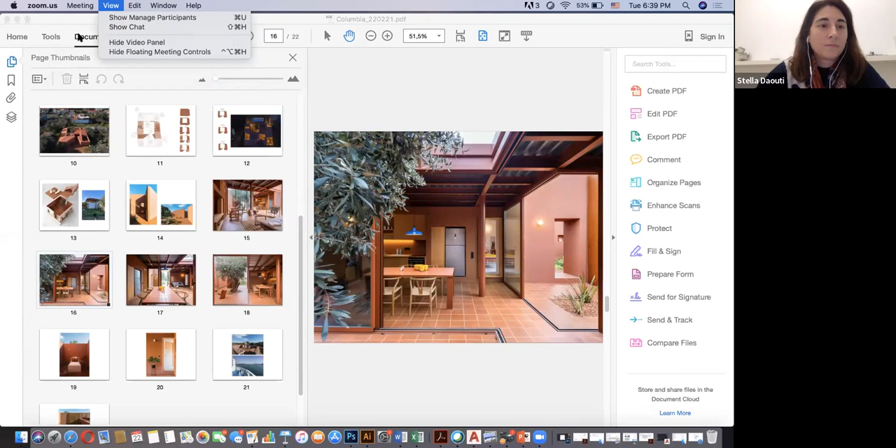I'm going to share my screen in order to... can I do that? Yes. Okay, I think I can now. Okay, here we are. Is it good now? Can everyone see the screen? Yes, we can. Okay, thank you.

So today we're going to present a very small project. It's a small house that we recently completed, and it's a very dear project to the office. It was designed together with Michael John Raftopoulos and Yorgos Mitroulias, who is also a Columbia alumnus, from 2004.

Salamis—many of you are aware of it—but it's a very interesting place. It's a small island really close to Athens, but at the same time not a touristic destination. On the contrary, it's very well known for its maritime past, its industrial zone, and its naval base, the military naval base. All these characteristics really shielded it from becoming a touristic destination like other small islands close to Athens, such as Aegina or Spetses. So for starters, this was an interesting place for us architects when we were asked to design a very small summer and weekend house for two clients.

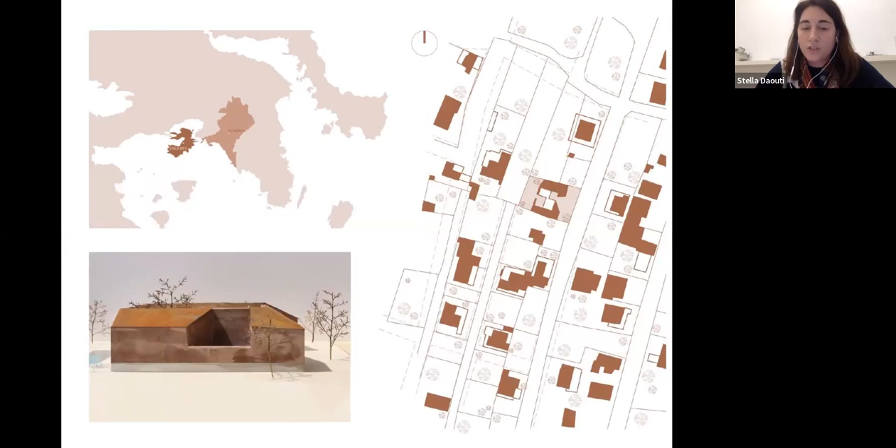That was another interesting part of the project. Looking closer to the neighborhood, you can see how the streets are narrow, they don't have pavements, they're very rudimentary in terms of infrastructure.

That was a part concerning context that really interested us. Another part of interest in this project was the way it was designed. It was a very open-ended process. The owners, a middle-aged woman with her son, did not have a very specific list of needs, as many clients usually do.

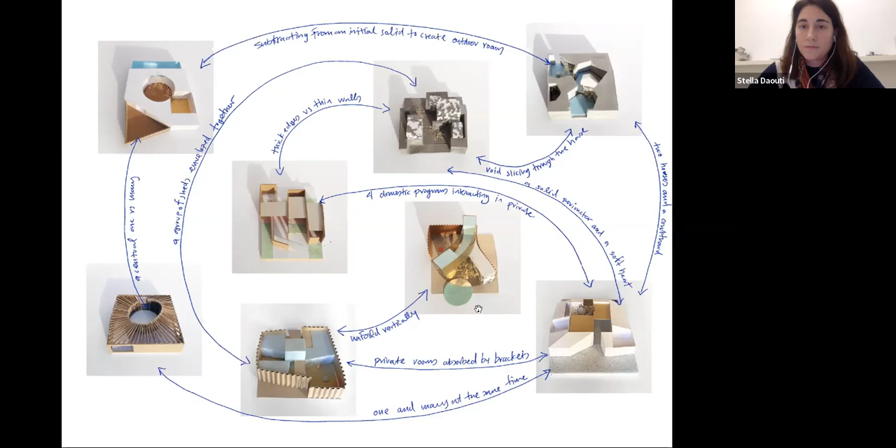For us it was interesting because, comparing it to the existing surrounding houses that had this concept of addition, in our case it was a bit the opposite. We started with a very solid volume and started subtracting from it in order to create courtyards that the house would look into, mainly this central courtyard.

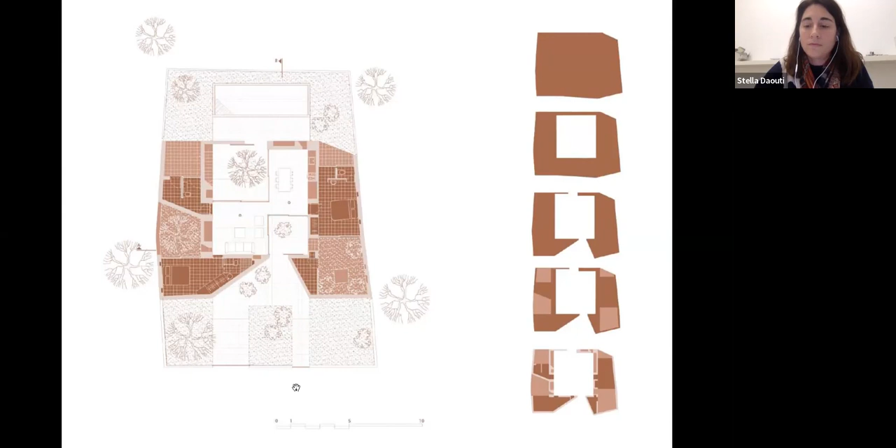In the central courtyard one can find a first small courtyard that serves as an entrance court. Then you have two smaller glass volumes, lightweight constructions, that host the main spaces of the house - the living room, kitchen and dining room. The olive tree courtyard is the second courtyard of this big light square that leads to the back of the house, where you have a small swimming pool.

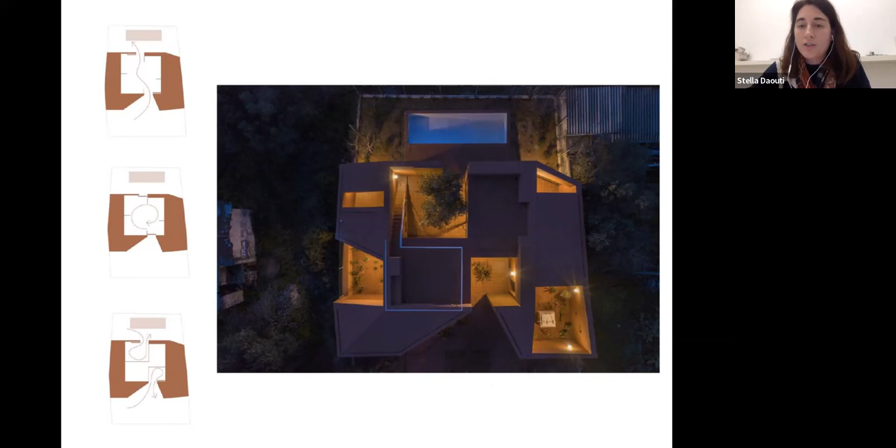In those diagrams, one can see that the enclosed parts of the house have full height sliding doors that can open or close in different ways, creating an interior that is very flexible. One can have an interior that gives more to the entrance area, or one that is completely enclosed, or one can slice the house in two, with one part open to the front and one part open to the back. This is a very flexible and open space that creates different relations between exterior and interior space.

So here you can see again this central square space, and in comparison to the lightweight construction found in our neighbor's house, which sits on top of the main house, in our case the lightweight construction sits inside, in the center of the house.

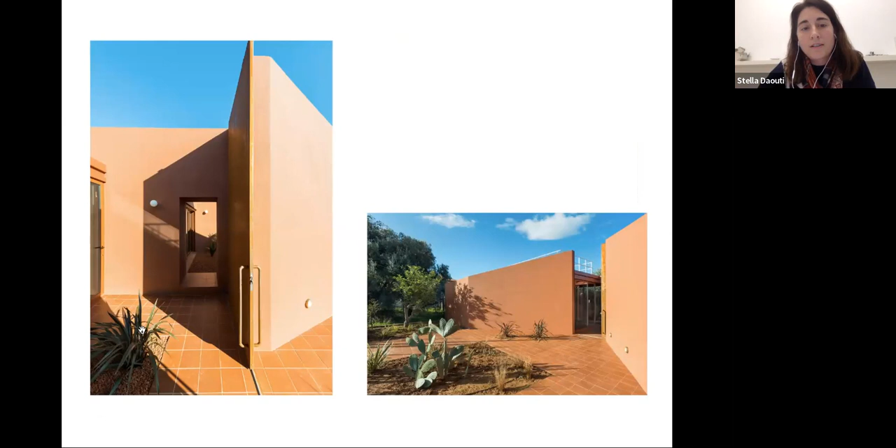Here's the entrance of the house. It's very austere, very monumental. But once we enter inside, this is the central courtyard with the two main spaces that can host a number of domestic rituals one can imagine during a weekend or a summer in this house.

I think that in terms of materiality, there were also a lot of influences coming from the island. We decided to use the primer red paint that comes from the maritime history of the island.

And then one can see on the sides, we have encaved the more private spaces of the house. So this central space works again as a collective space. The house itself becomes a small village where the two more private spaces are found together in this central collective space.

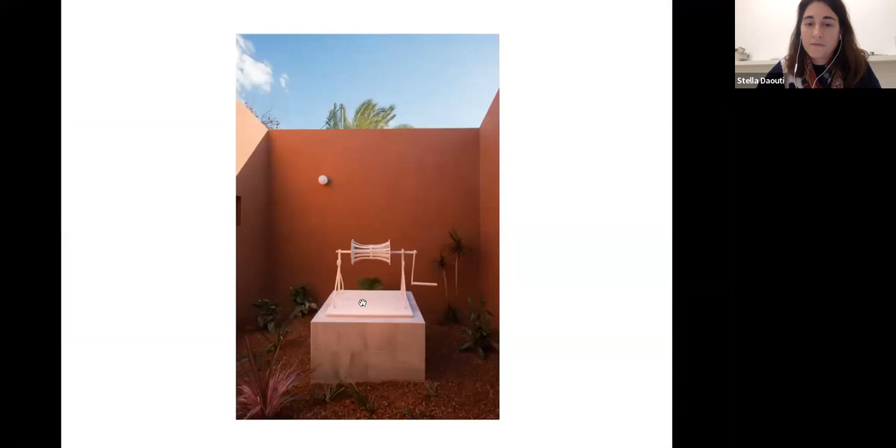The well courtyard, entering at the more private spaces where you have a different feel, more lighter materials. And on top of the house, a small terrace where one can see the olive grove. And one might feel being on the ferry coming to Salamis Island.

Again, this reference to the ferry boats, as someone is leaving the city in order to arrive to the island, we imagine that this door closes behind you and you live your everyday life and become submersed into this more tranquil space that the house offers.

And I think that's it. I don't know how was regarding time. I know we only had 10 minutes, so I'm not sure.

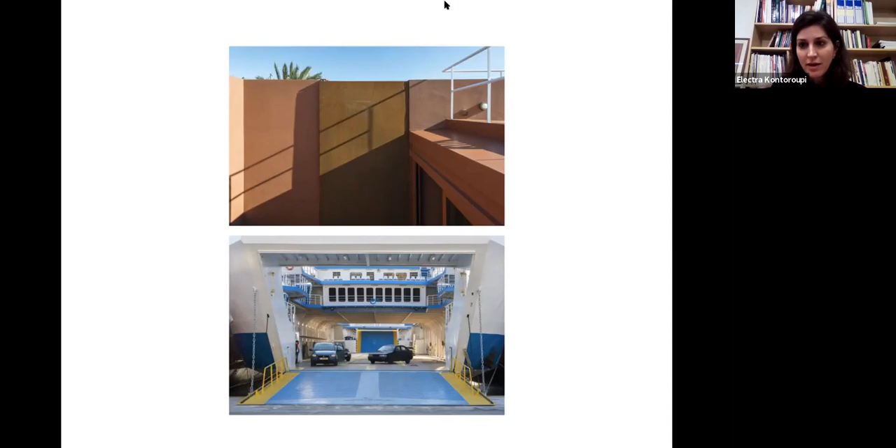And we're going to change completely scale. From a small residence, we're going to move to the urban scale of a city square. Because Evita Fanou and Ariadni are going to present the new design of Aristotle Square in Thessaloniki, a competition they recently won.

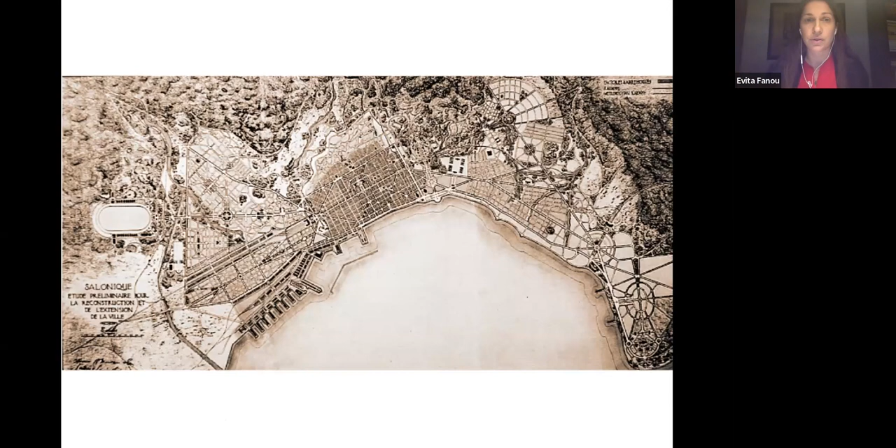This is a zoom in on his plan from 1919. This is Aristotelus axis. Our intervention area, according to the competition brief, starts from the middle of the axis to the sea, including a square by Egnatia Avenue, part of the Aristotelus axis, and this uniquely shaped Aristotelus Square as we know it today.

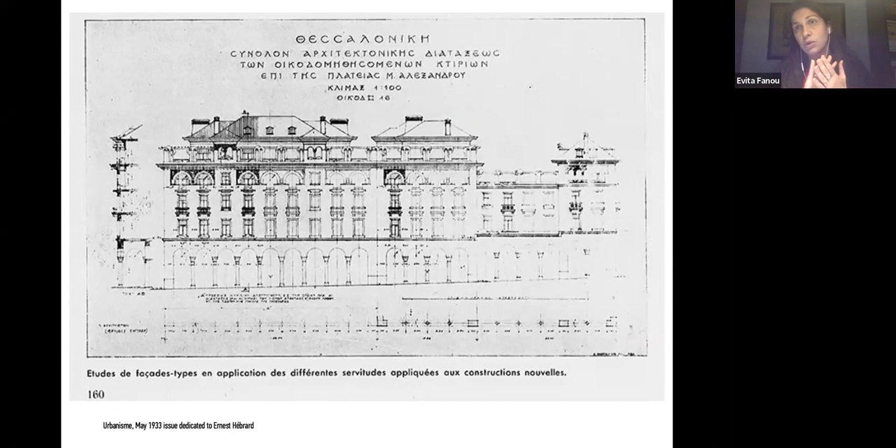This was a big part of the design of the area. He didn't stay with the plan, but also designed the elevations, one of the most specific characteristics being this covered stoa with commercial use on the ground floor, creating this very unique architecture that unifies the public space in our area.

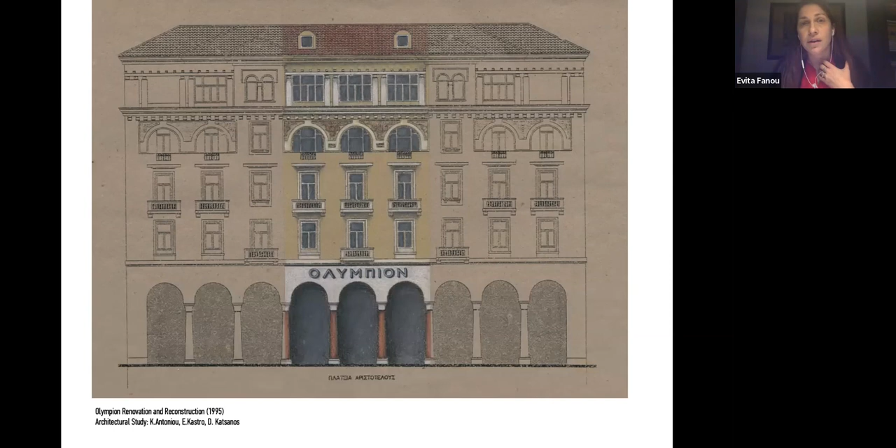We can see a little bit more here with some renovation and reconstruction that happened on those buildings two decades ago, in 1995. Here we can see also the original colors and all these details. This plan of Ernest Hébrard didn't happen in one night, as we understand.

During the course of its history, in recent years, two dates we should remember, because they somehow define the city as we know it today. The first is 1997, when Thessaloniki was the cultural capital of Europe, and part of the axis was pedestrianized. It was also the year an international architectural competition was announced for Aristotle's axis and square.

The first prize was never realized, partly because of the extended excavations that were proposed. Then, many years after that, last year in 2021, there was a new international architectural competition for Aristotle's axis and square, but for a part of the former 1997 area.

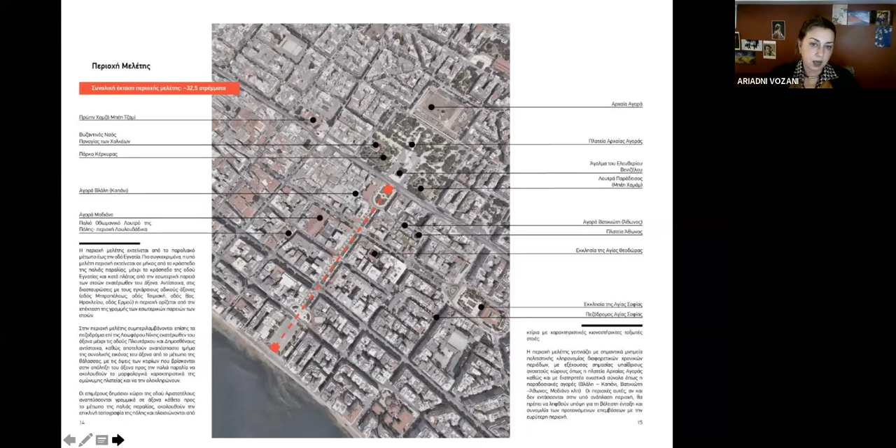Here is an aerial view of how it is today, more or less. We are facing north here, toward Egnatia Square, and facing towards Aristotle Square and the sea. You can see something quite important, that the main axis, as well as extended parts of the pavement, are green areas, so they are not dedicated to circulation.

I think this image shows something quite important for us. It shows these orange buildings, monuments, landmarks, that it's very easy to understand belong to another urban fabric, not the orthogonal urban fabric of today of Ernest Hébrard, but the former tissue of the city, the one we already explained. It was the one destroyed by the fire of 1917.

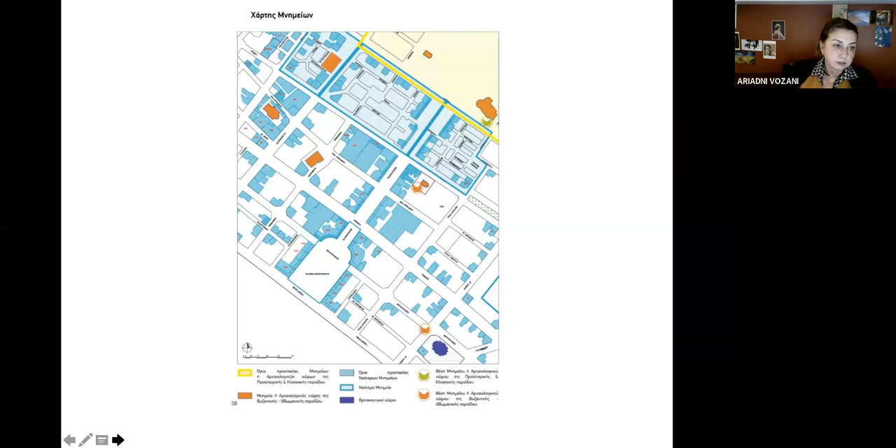Now, we thought there is a kind of memory of the recent history of the city, because of course you may know Thessaloniki has a long history, a Byzantine and Roman history, but this recent history of the city was completely erased in a way. Yes, and it's exactly this map that brought us to our first ideas about the competition.

These orange buildings that were kind of off the grid of Ernest Hébrard, it was a question mark for us. So when I say 'we,' I have to first make a parenthesis and say that we're a team of 5 people, not only me and Ariadni. We also collaborated with 2 more architects, Gregory Voutoufianakis Petropoulos and Dorette Panagiotopoulou, and an architectural student, George Retsos.

So, starting from this map we found in the competition brief, we started putting some questions together, wondering where these monuments actually belong, because these orange buildings were actually monuments of the city. We found a map of the city in our area before the 1917 fire, and we discovered that these monuments actually belong to this old grid that is underneath the new Ernest Hébrard orthogonal system. We thought this old city is a memory that needs to be explored again, highlighted selectively, because these monuments belong in this grid, and this grid was giving directions to these monuments.

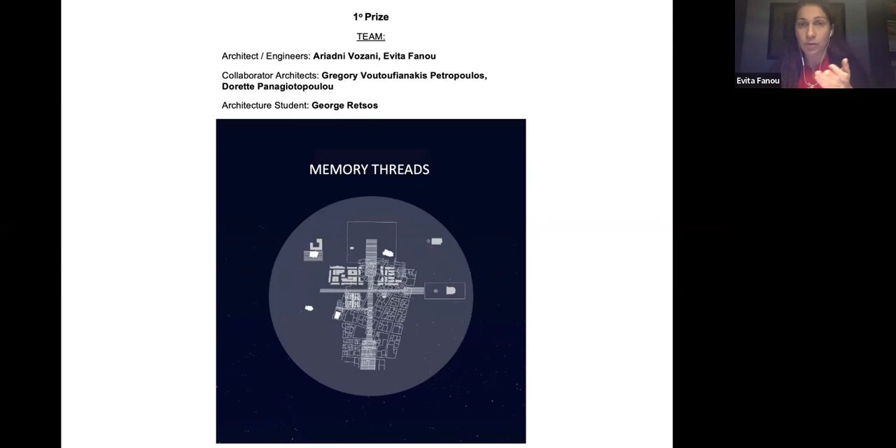So we selectively bring back some threads of that memory of the city that exists. And you can see later how, as we explore and show our proposal, these threads are actually coming to life. You get a glimpse here of how these threads are activated also in the nighttime—they become light fixtures on the floor of our proposal.

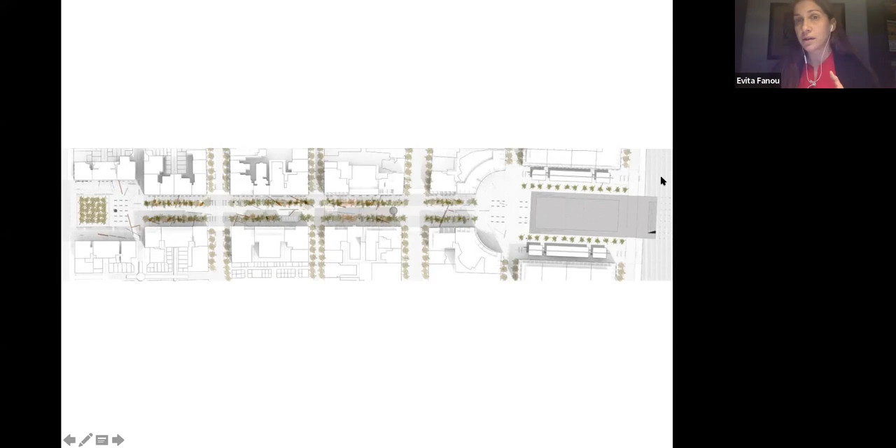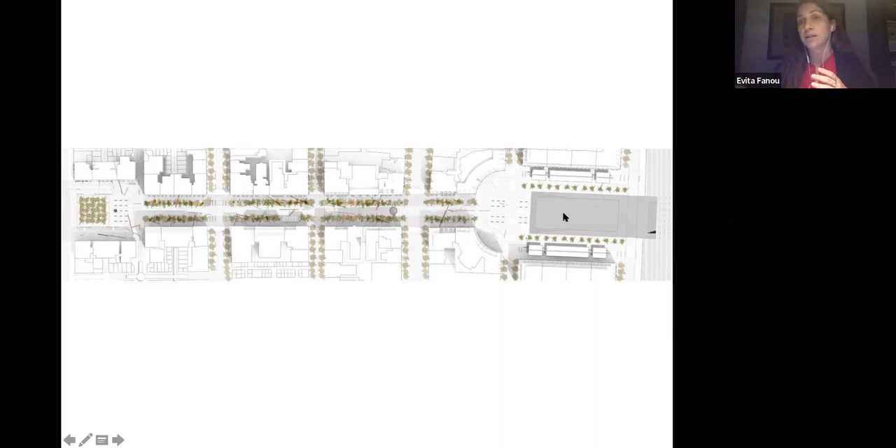And this is the plan, the actual general plan of our intervention. It starts on Egnatia Avenue with a small grove of palm trees and a small threshold between the north of the axis and the south of the axis we were asked to design. We create a linear wide allée in the middle of the axis for people to walk, with trees on both sides, and then we end up on Aristotle Square, creating a central point with different materiality that we extend towards the sea, with some steps where people can sit and enjoy the view of the sea, Olympus Mountain, and the sunset.

In order to understand this drawing better, it's important to see all the different layers that bring it together. We start with the bottom layer—this axis and the whole proposal is organized in parallel zones of circulation, with the middle being the central zone for slow movement. The two different squares were treated completely differently; they have a completely different significance within the city, but they both work as thresholds to connect our proposal with the north and the south, respectively.

The layer on top brings these selective memory threads from the past to that new floor we're introducing. We have another layer of seating typologies organized around the parallel zones that are holding the whole proposal together.

An important element about public space and how it performs over time is water. So we're bringing elements of water from the sea towards the proposal to the north, in different typologies that we categorize as different urban equipment with water. And last but not least, the plantation, trees and greenery that also create shadows across the proposal, and some canopies that were conditioned by the competition to organize the outdoor space of the cafeteria.

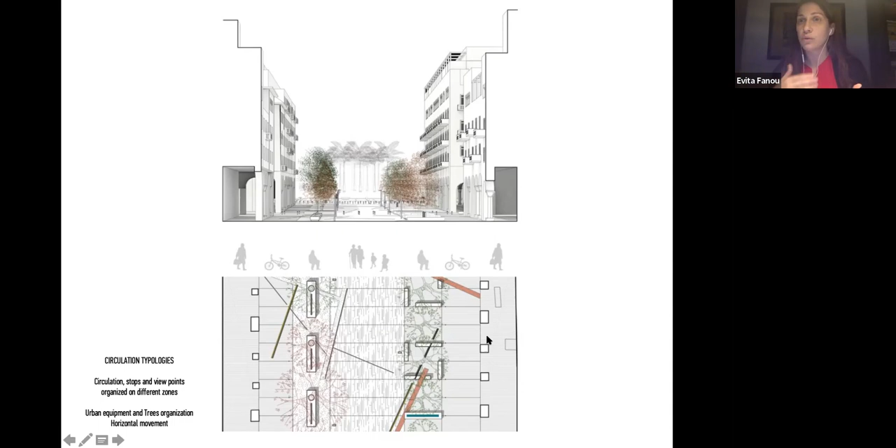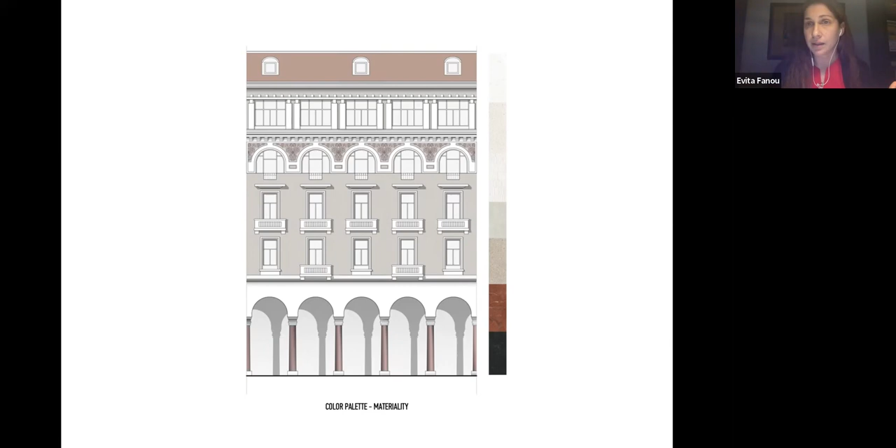Another big aspect of our intervention and proposal was the materiality of it. We decided to borrow the color palette from the Ernest Hébrard listed buildings and translate that to earthy, natural Greek materials like stone and marble, which unify the public space and make the proposal part of the existing context of the Ernest Hébrard buildings. This is a view of how it could look when the zoning, the diagrams, and the actual life on the axis all come together.

Now, even from the beginning of the competition, the decision was to have a mild proposal with continuity from one square to the last, the Aristotle Square.

We strongly believe that underlining specific elements in each different part of this axis, while giving a specific identity, character, and atmosphere to the two squares, was something we had to achieve. So we call these parts of the proposal 'rooms,' even though they're not exactly what we would call in the Renaissance an urban room.

There are five of them. The first is the palm tree room, as we call it, the square adjacent to Egnatia. The second we call the water room and open market room, because there is more strongly the element of water, but also a substructure for an ephemeral market, which you'll see later.

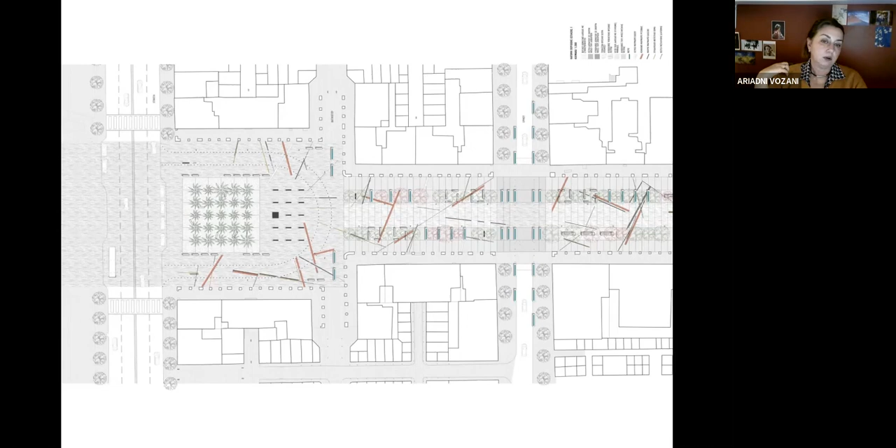Here I think you start to recognize all the rules of the design. One can easily discern that every element of the proposal belongs to the orthogonal grid of the city, but then some selected traces, as Evita said, are highlighted as a hint of the old urban fabric.

We strongly believe this square had to have a kind of natural canopy, and the palm tree offers this canopy, but with long trunks that for us felt like a colonnade. This was important because from the beginning of this promenade, you constantly had to have the view of the sea at the end, but also be able to see the surrounding buildings.

This is a very rare environment for Greek cities, because we don't usually have such a continuity of facades. Not all of them are very important buildings or facades architecturally, but together they offer a continuity that is a very strong urban element.

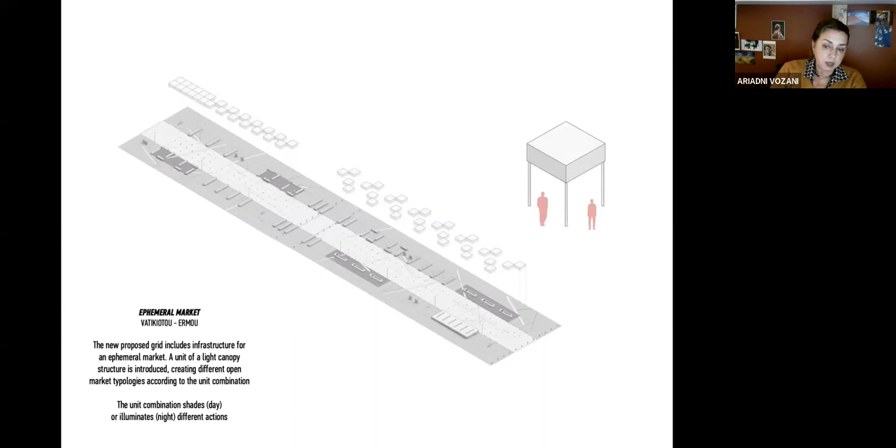Adjusting to that, this part can host an ephemeral market, as the proposed grid includes infrastructure for it. A unit of light canopy is introduced, creating different open market typologies according to the unit combinations, and this unit shades or illuminates different actions.

Then we have the Magnolia Room and the Room of Time. You can see the plan here—this is the Magnolia Room, and this is the Room of Time with a listed clock.

And you see for this specific part of the proposal, we also introduced a specific seating element that includes the magnolia trees.

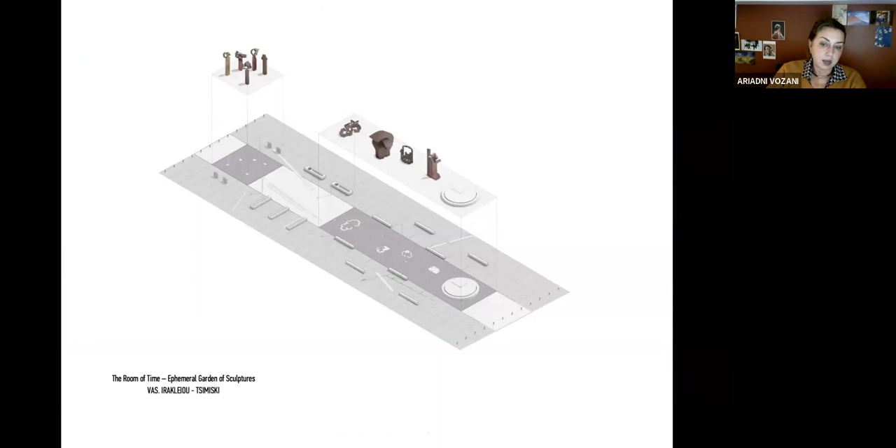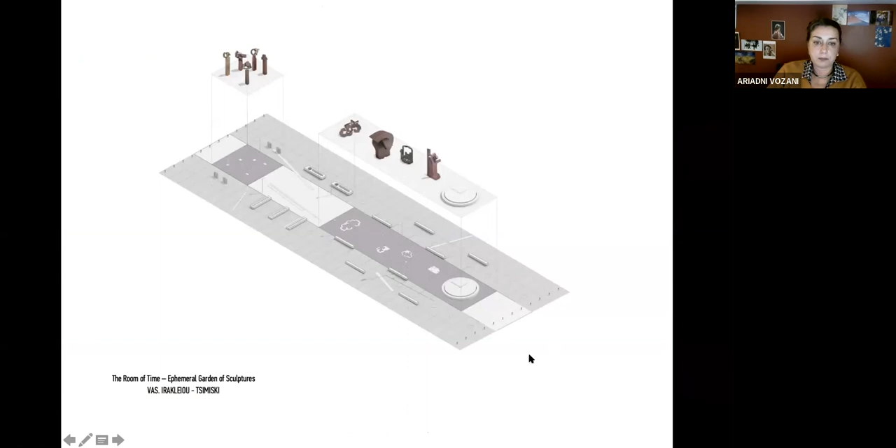This part, the Room of Time and the Ephemeral Garden of Sculptures, we also introduced this area. You can see a slightly different color of the pavement, showing the area that could host an ephemeral exhibition of sculptures from time to time.

We used Chillida sculptures, but we'll see what it becomes. And here is the sitting kind of clock. The surface has a kind of surface of water. It's not easy to see maybe from this image.

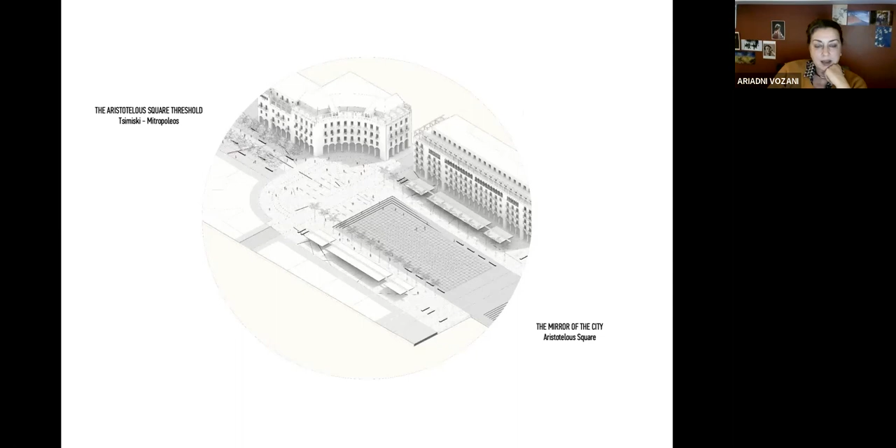And finally we conclude to this Aristotelous Square threshold, a very important semi-round shape that we had to work on in order to introduce the peripatiti, the walker, to the actual grande finale, we could say. The threshold is something like the in-between space that connects the dots of the walker.

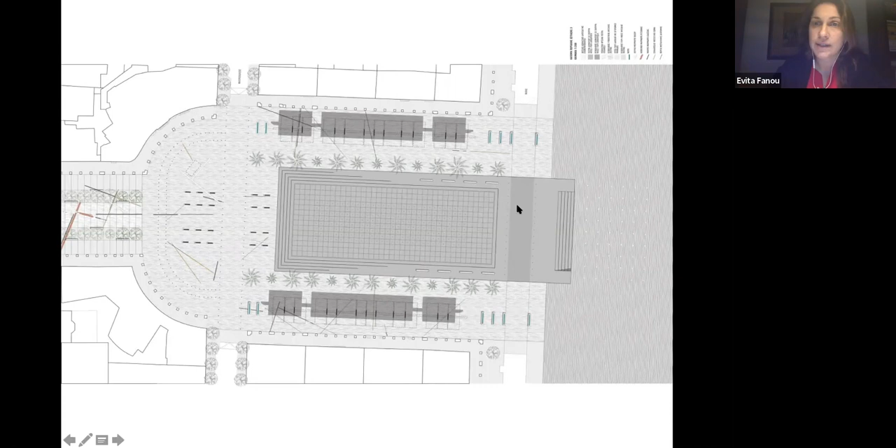This is the plan that we submitted for that part. You can actually see there is a small recessed, only 3 steps area, in order to create a central area of stop and see. And we extended that materiality into the sea. That's a view between the threshold and Aristotelous Square.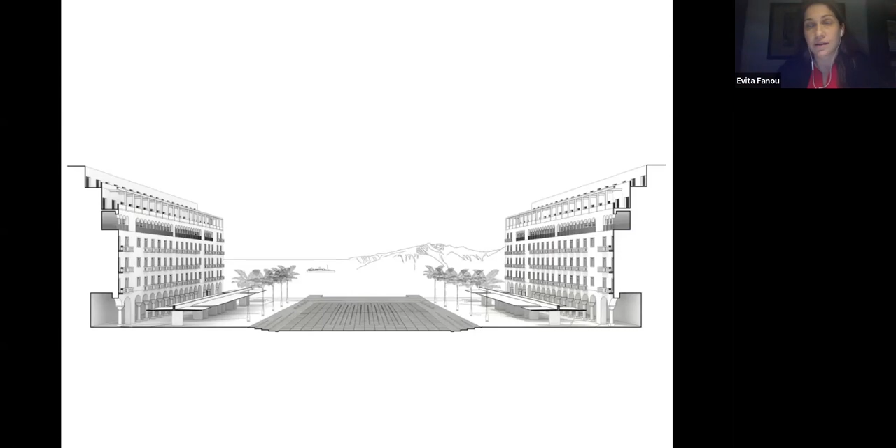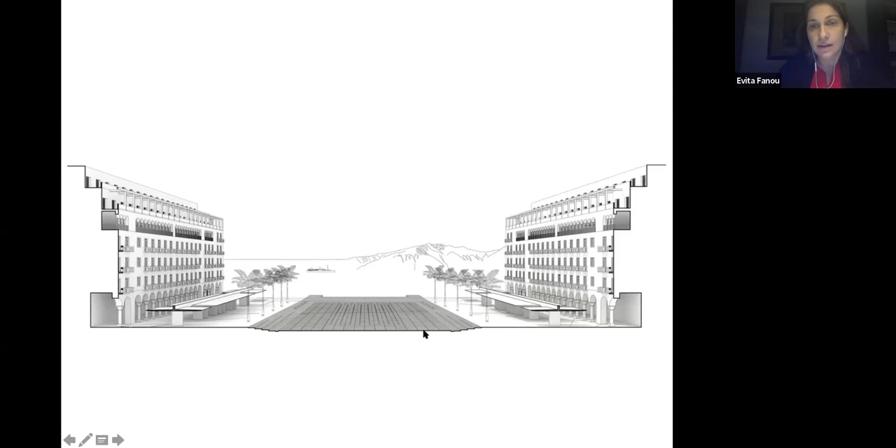We can see also the canopies and how these have a relationship with the buildings. And these few steps create this seating area on the north of Aristotle Square only. In this section perspective, with the Olympus mountain indicated when we have a clean atmosphere in Thessaloniki, we see how the buildings and the covered stoas have a relationship with the canopy, the recessed Aristotle Square, and the other side the same thing. That's our view of how we imagine Aristotle Square to be in the future.

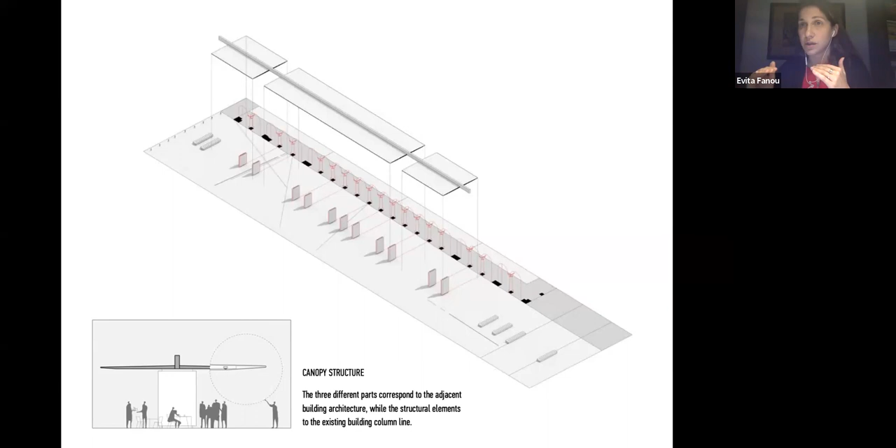The canopy is a structure that was also a condition of the competition. We had to design a canopy structure that will accommodate the outdoor space of the cafeteria and also control how wide this outdoor space will be. So what we did is we created a structure that has an open dialogue with the elevations of Ernest Hébrard. The column line follows the column line of the covered stoas. The 3 parts of the canopy correspond to the 3 buildings architecturally, and the height of the canopy also has a dialogue with the height of the columns of the stoa, but in a different design, of course, that looks more like this.

This is kind of how the canopy has this relationship with the openness, as we call it, of Aristotle Square. This is what we wanted Aristotle to be, an open space.

One of the most important parts of Aristotle's design for us is that we are introducing an element, the element of water, a water evaporating system that transforms the square according to the time of the day, month, or year. So it introduces the element of time as well. While the system is on, the square is transformed into a playful area for children to play, and it also changes the microclimate on a very hot day.

When the system stops, but the stone on the surface of the square is wet, it makes it reflective. So it becomes a mirror, metaphorically, because it mirrors the buildings of Ernest Hébrard and creates a beautiful event at that moment, and then it dries out again. So this circle of water brings the circle of time into our proposal, but we believe this transformation and metamorphosis is a very important aspect of how we want the public space to function.

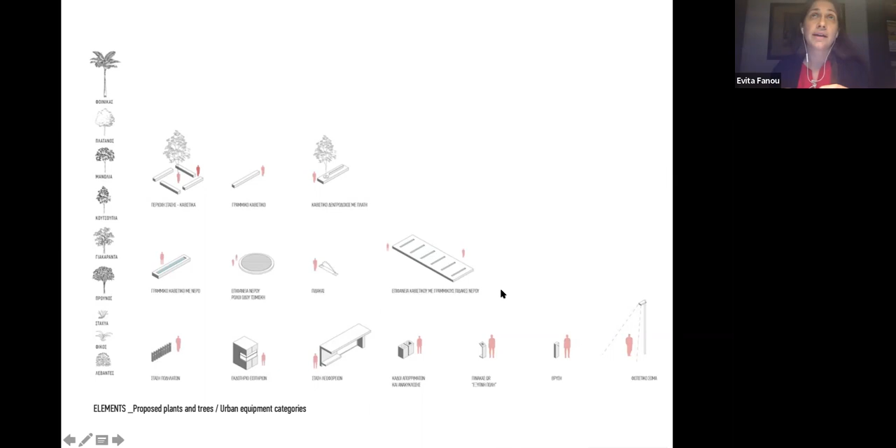We also have our elements. These are the elements, and the rhythm we repeat creates how the space, the axis, and the square are formed. We have urban equipment, seating equipment, different typologies of water, and also plants and trees that we propose.

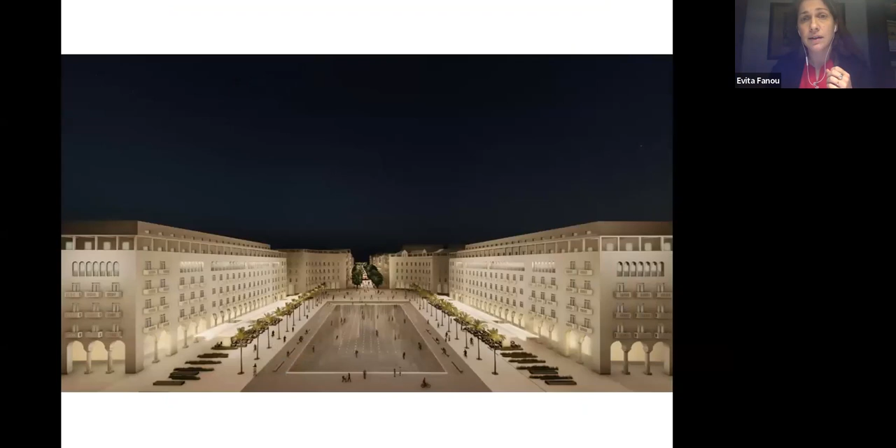I'm going to actually share also a video with you if I'm not running out of time. I'm going to borrow some time from Stella because she was so fast, if that's okay with you. Okay, go on, Evita. Tell me that it's okay with you.

The video was a very difficult precondition of this competition. It's not very usual to ask for a video of the city with your proposal, especially when we didn't have the buildings of the city. So we had to design all the buildings of the city area through research from the Ernest Hébrard designs, but also from Google Maps.

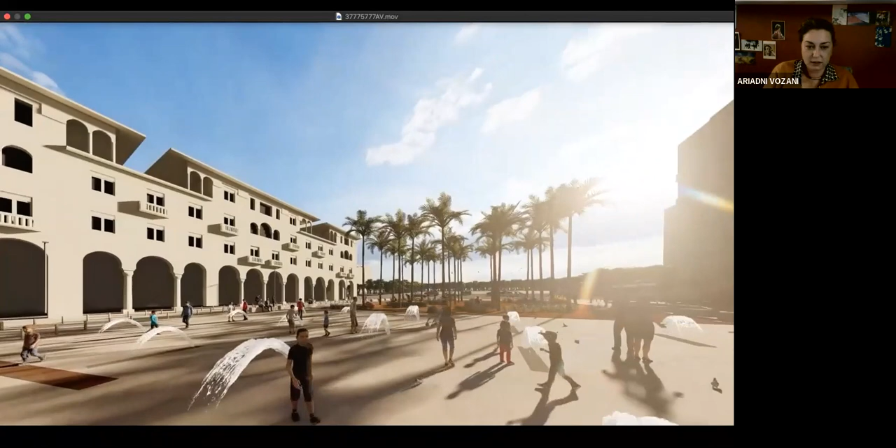We start from the north, of course, from Egnatia, as you have seen before. So the idea is that the video always shows part from the bird's eye view and then goes down to

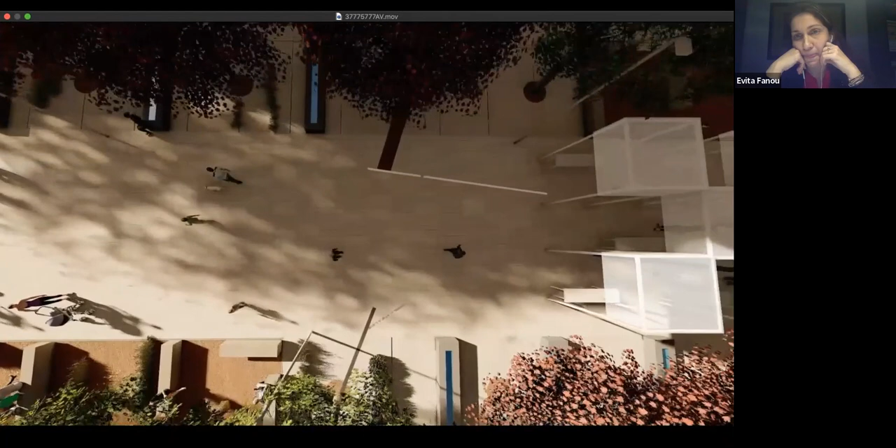the eye view, describing parts of the axis according to the rooms we described. And that's the ephemeral market. It's one of the typologies that could actually be. There are the sitting nooks, and we're introducing some beaten earth, like soil, in certain areas.

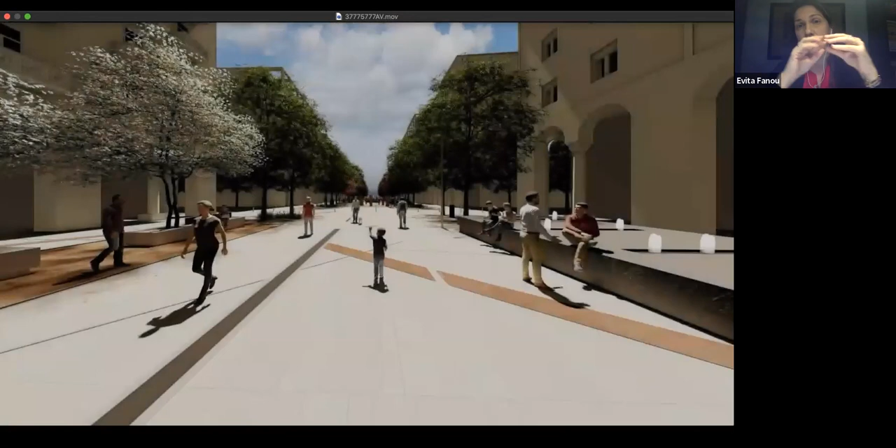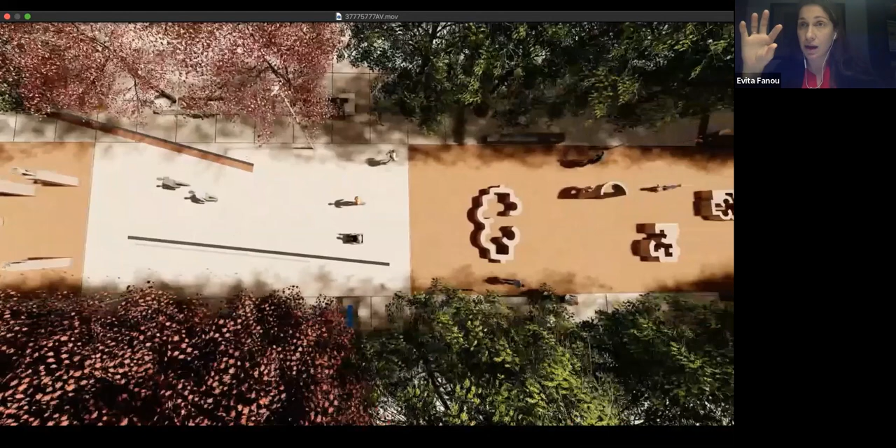We actually see how this wide esplanade in the middle is functioning with all these parallel zones we described, and how you can actually see the sea from any part of the proposal. Different kinds of trees are introduced in different parts of the axis according to certain moments that happen in the city in certain areas.

That's a better view of the clock that we redesigned to be a sculpture that people can sit around, with this rotating sculptural garden that is also working as a metamorphosis of the public space.

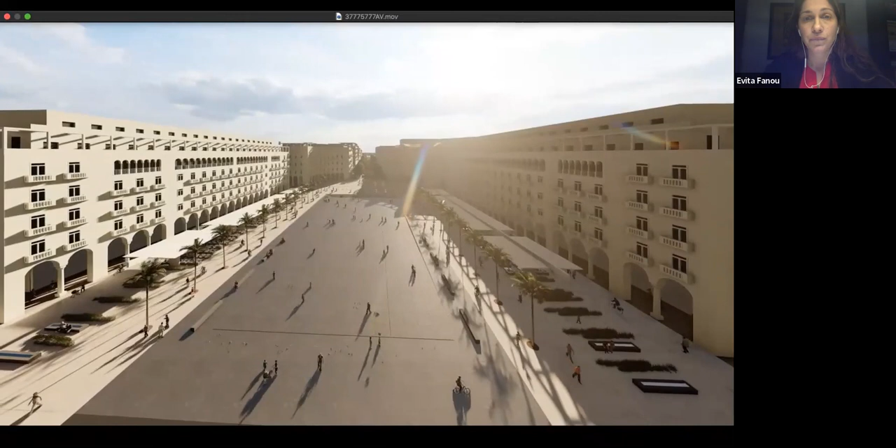And then we have the threshold, always using the elements of water, trying to bring the water more into the city. And the open Aristotle Square, canopies. And that's the steps towards the sea.

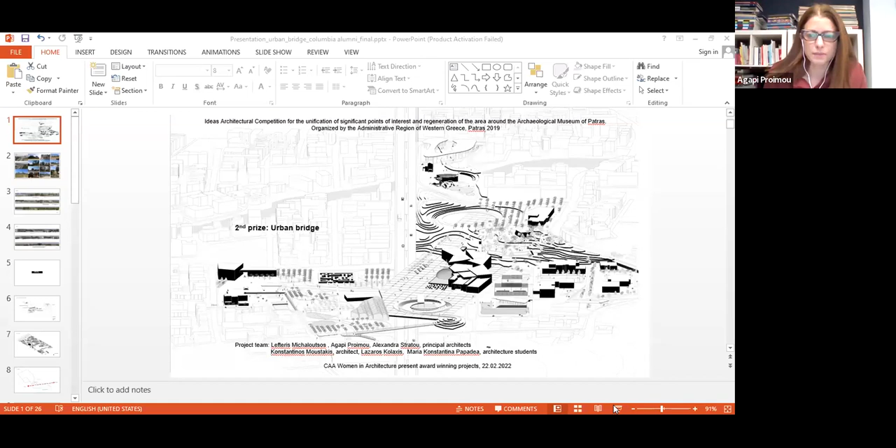So I'm going to present this project that we did with my colleagues, Alexandra Stratou and Lefteris Michaloutsos, and also with a team of architects that was Konstantinos Moustakis and two students of architecture, Lazaros Kolaxis from the University of Crete, Department of Architecture, and also Maria Konstantina Papadea from the Department of Architecture in Patras.

The project was a public competition organized by the administrative region of Western Greece in 2019, and the theme was the unification of significant points of interest and regeneration of the area around the Archaeological Museum of Patras. We received the second prize for this project.

The project is mainly a reflection on the pressures forming the cities in the Greek region today and the pressures transforming their surroundings as well.

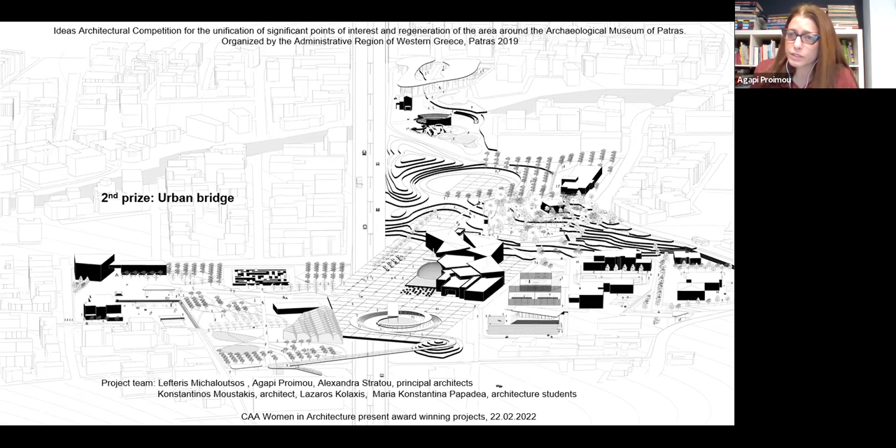The competition site is found in the suburban area of the city of Patras, which is the third largest city in Greece, and it is located on both sides of the highway that connects Patras to Athens. The surface area of the site is 165 acres, so it's a very big scale — between a landscape project and an urban design one.

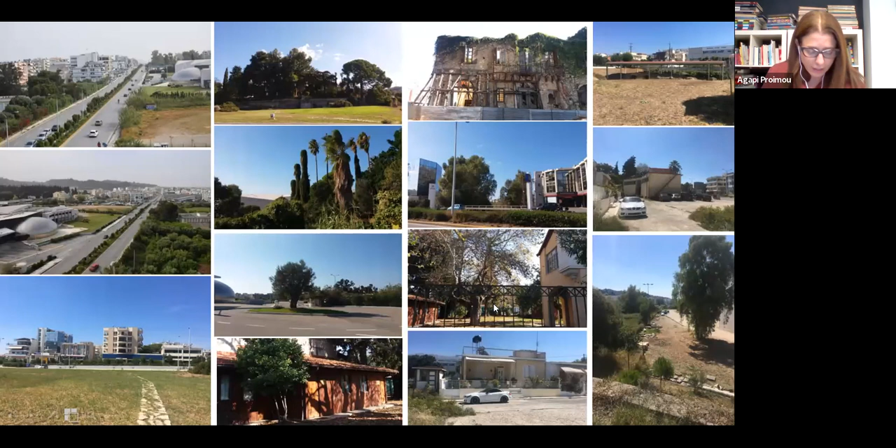This is the garden of the old agricultural school in Patras, and this is the ruin of the agricultural school. It is a very dispersed, fragmented space with crops and dispersed green spaces between significant public and historical buildings and archaeological findings. There are also the findings of the Roman bridge at the beginning of the site.

There are a lot of major altitude differences also on the whole site.

So in order to realize and understand such a big area, we started doing the mapping. I'm going to present these diagrams—maybe you'll understand more what's happening.

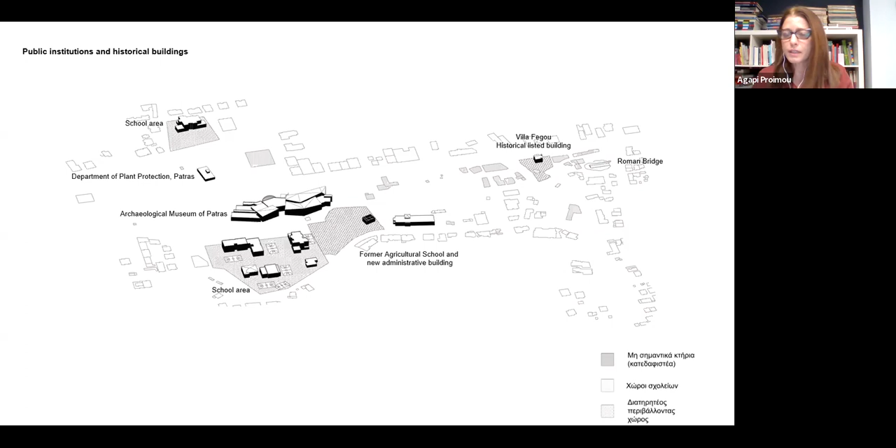The first diagram shows the buildings that we are about to preserve, and at the bigger scale is the Archaeological Museum of Patras. They are completely isolated between them and not connected because, as you saw in the pictures before,

in between them there are empty spaces that are inaccessible. The figure-ground relation shows a lot about what's happening in the areas where the city is expanding without a plan. The city is expanding on both sides of the highway—initially in larger extent and density between the coastline and the highway, but it also continues and expands between the highway and the Panachaiko mountain.

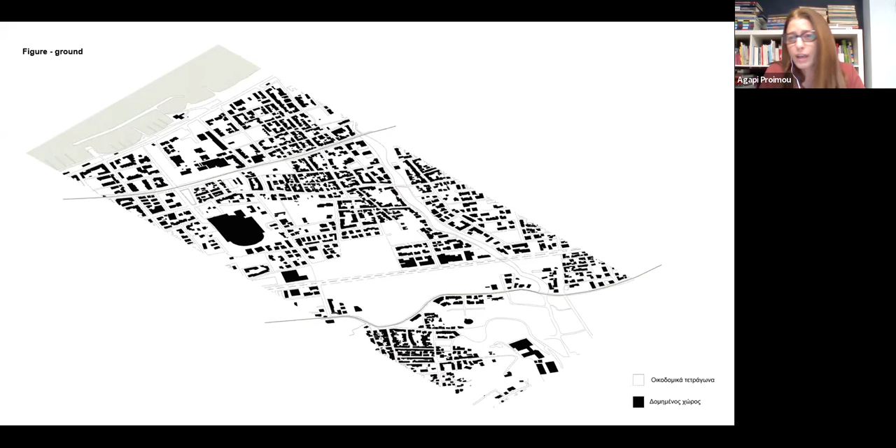The unplanned development of the suburbs creates a fragmented empty space, as we can see in this diagram, between the built environment. These empty spaces remain inactive and disconnected, and they don't have any cohesion of public space.

The national highway connecting Athens to Patras is the main road of large scale and importance that crosses the site. It divides it into two neighborhoods: Patloupoli, and Panahaki and Glyfada. Although the city suburbs have developed longitudinally on either side of it,

the highway has not changed. It remains a relatively high-speed road with few crossings and traffic lights, so people actually cannot walk around this road.

The planting in the area—you can find low vegetation mostly for recreation around the museum. Then there are olive and orange groves, and also the garden of the agricultural school, which is a great experience to walk around; it's a very nice place and space.

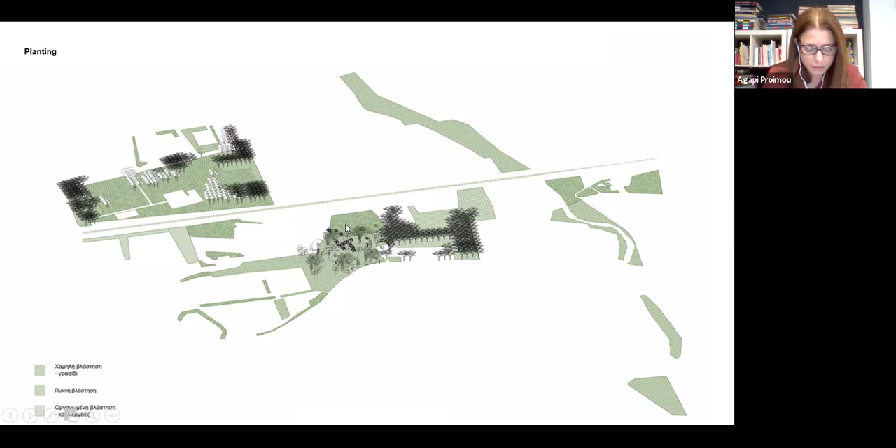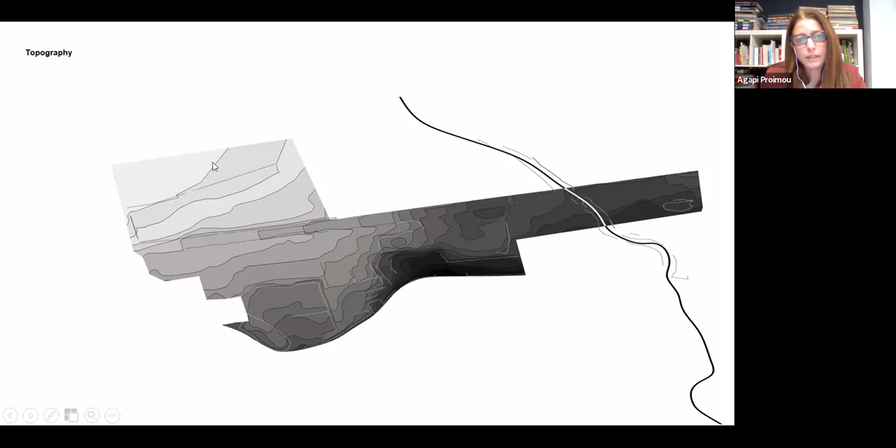In the site area, there are a lot of altitude differences. Here you have the garden of the agricultural school, which is on the higher level. And here, where the institution is—the Department of Plant Protection—it is at a lower altitude, even lower than the highway and the museum.

So our idea and our main concern was that our proposal aims to eliminate boundaries and establish connections between the points of interest.

The cities of the Greek region, in contrast to the urban character of the capital city, tend to accentuate the relationship with nature, the connection with local tradition, and the human scale of their environment. But this is a quality of life that refers mainly to the past.

The growing economic and administrative independence of the regions, and their economic development, redefine the role of smaller cities as new urban centers with a hyper-local character. Their power is growing, and they need to take on their future urban role as administrative and cultural centers—it is more important than ever.

So in this idea, in this vision, we envisioned a new urban center completely unrelated to the urban core of the city—a next urban center with different features and characteristics. It is formed by these architectural gestures that we are creating, like a gridded surface connecting the institutions and buildings, and it forms a very distinct public space.

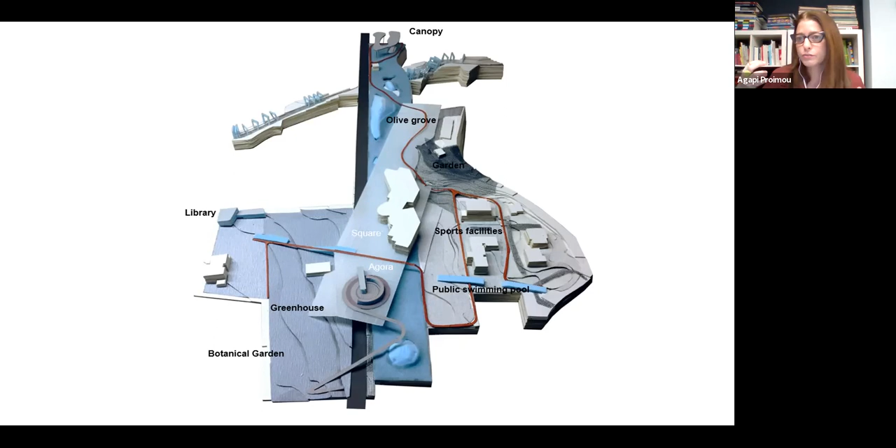We are also introducing a lot of programs in the empty spaces, designing the landscape to create a new center. The idea is that this is a nodal point, and then it becomes a region network with another nodal point created in the city—we're going to have a lot of centers, not just the historic center of the city.

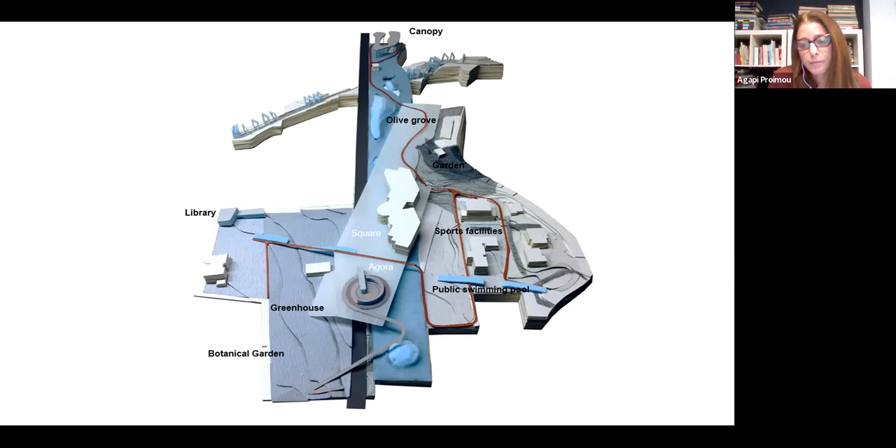So this is the model that we produced just to understand the space. And I'm going to explain now the mode of operation of the architectural idea.

The first thing that we did is undergrounding part of the highway, and a new traffic node is constructed at the connection of the highway with the site, connecting the Archaeological Museum, the Department of Plant Protection, the city of Patras, the neighboring regional cities, and finally Athens. So on the basement, underground, there is a traffic junction that connects to a very big parking space.

And we are making all the connections. So you can park your car there, and then with a very vertical circulation, you can just go up and find yourself on the urban space of the public square. So this is the first gesture, the first movement.

And then the second one is creating this very clear urban bridge, we are calling it, which is a gridded surface divided into 4 distinct areas. The first area is here, where we are extending the olive grove that we found there, creating an arena, a big clearing, an open space for large concerts or other events.

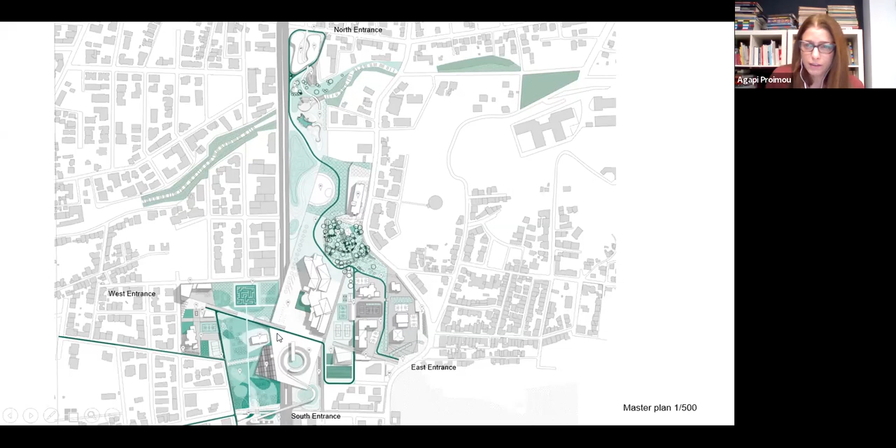At the end, you can find the open market, the agora, we are calling it, and also the connection going down where there is a greenhouse, that is the research center for the Department of Plant Protection. They already have a greenhouse, and we are just redesigning it.

Also, we are establishing 4 very clear entrances from the 4 points, where you can approach the area and the park. Here you have a west entrance from an existing public square. Here is the east entrance, and this is the school area.

On top, you have the entrance from the canopy that you will see later, which is protecting and sheltering the archaeological findings of the Roman bridge. And here is the south entrance. It's connecting, it is a pedestrian bridge, and it is connected more to the city.

So in this way, you can get yourself up into the park and find a way to walk around and realize the new conditions of the space. Also, there is a zone here we are calling a mild topography zone, because we wanted to find a way to isolate this space, this landscape, from the noise and hustle that the highway is creating.

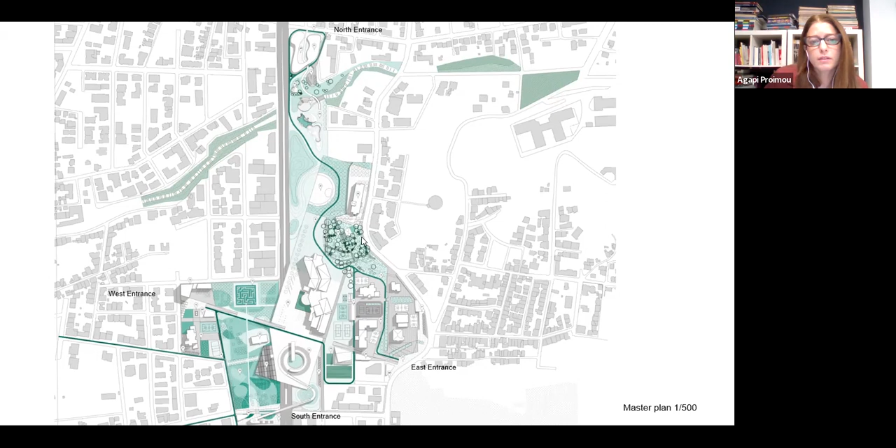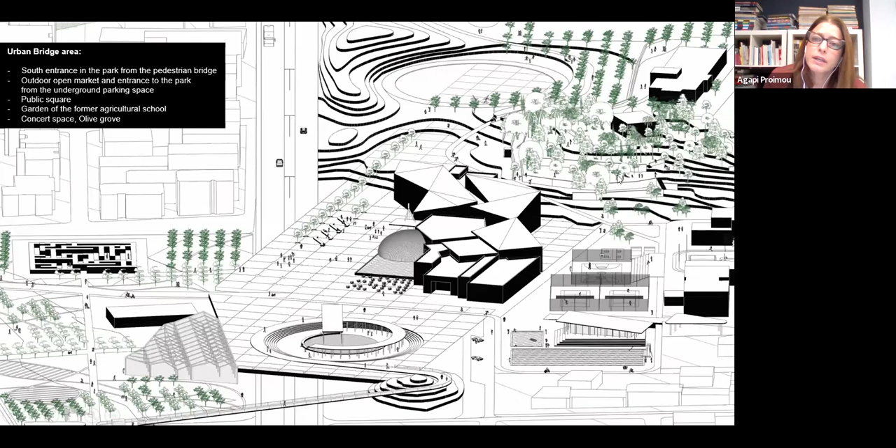Here is an image, a zoom in on the axonometric of the soft materiality zone, the mild topography, we're calling it. At the north entrance of the site, there is a canopy used to shelter the Roman bridge findings. Also, the shape of it and the way it is designed creates an entrance to the zone and to the park.

Here you'll find another historical building, Villa Fegou, used for lectures and various presentations from the University of Patras.

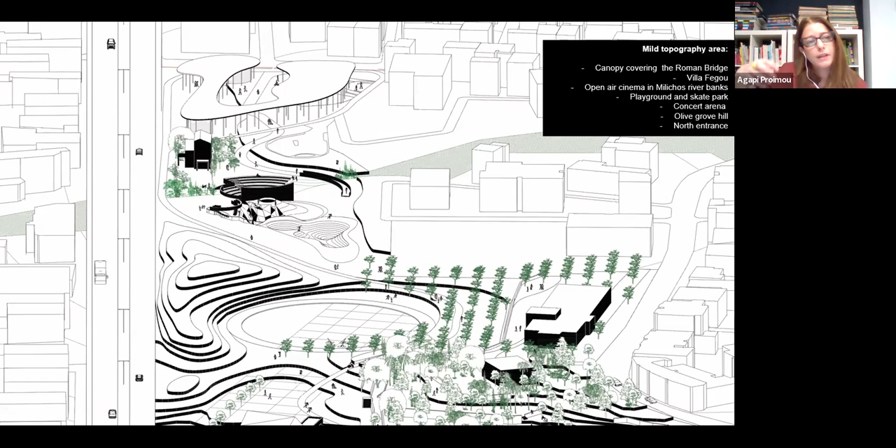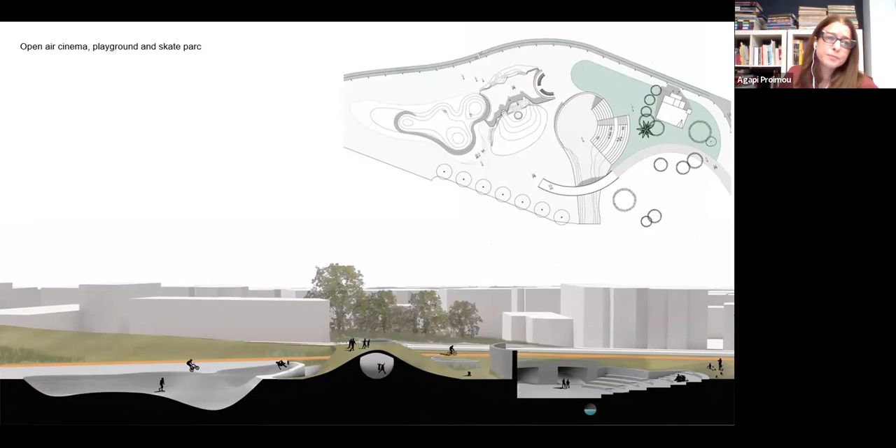Here is a perspective section from the mild topography zone, with the playground, the skate park, and an open air cinema designed on the banks of the Milichos River.

Also, the concern was to find a way to unite the two different neighborhoods created on the west and east side of the highway, the neighborhood of Anthopoli and the neighborhood of Kourlifada Panahaki. This was organized with a ramp beginning from the west side and from the new hub we're proposing here for a new library.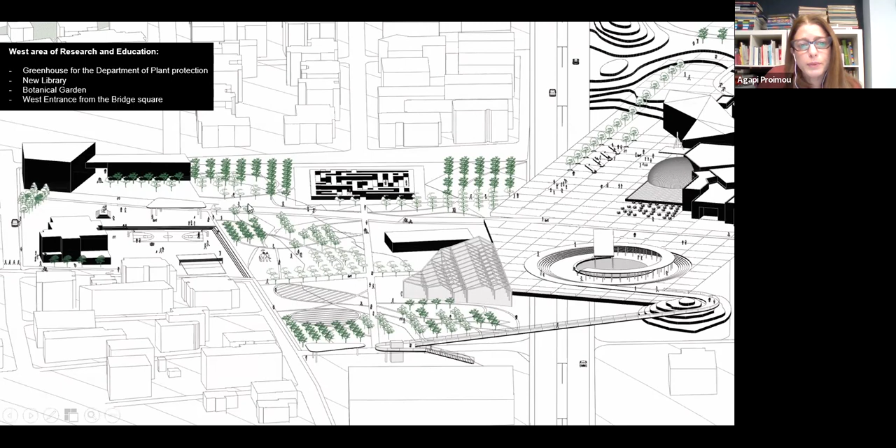The slope begins here and reaches through the urban bridge to the other side of the highway, the other neighborhood. So the two neighborhoods are connected, and they can find public space organized in the middle of their connection.

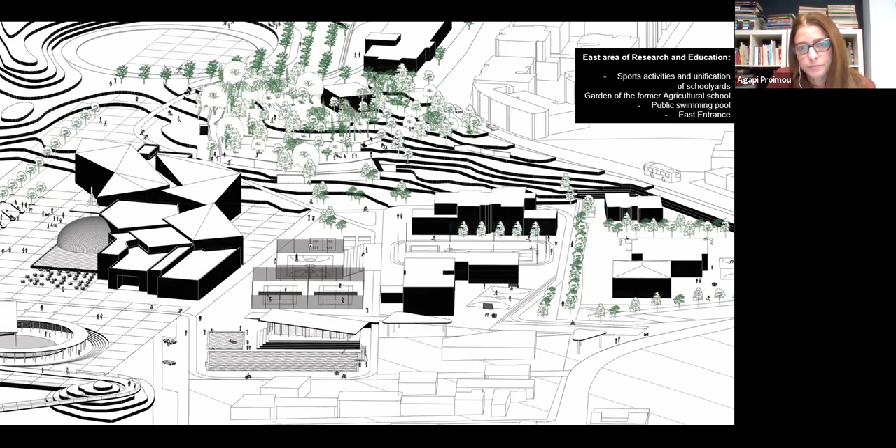Our interest in this area was dealing with what happens in such a complex case, where you have such a large site with so many different situations happening, and it's not organized at all. You need to find solutions to overcome all the obstacles of communication within the site.

What we ended up saying is that the transfer of a public building or institution, like the Archaeological Museum of Patras, into a suburban area of Patras, because of the size and the new needs and functions of such an institution, creates another kind of opportunity for this suburban area to form a different kind of center, with a different quality and a different thinking about urban space.

So we thought that such a big institution, in order to function and address public life, needs to have a very important public space. That was the idea of the public square and the urban bridge.

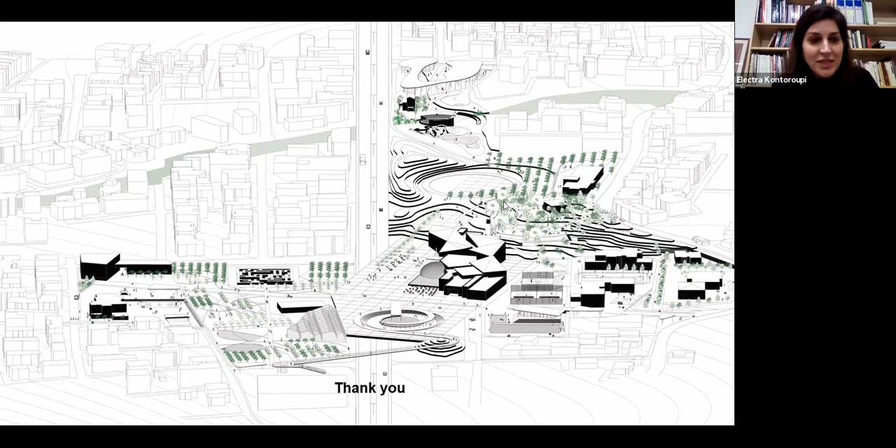Thank you, Agapi, for presenting this very complex project. It must have been a big challenge to deal with all these different parameters.

So after two interesting urban projects, a big one and an even bigger one, we're going to move back to a smaller scale, to the scale of small residences. Actually, a very small scale, because Parina Vasilopoulou is going to present a former warehouse converted into 25 micro apartments. I'll share a few words about Parina's work. She's a founding partner and managing director at Pearspace, an architecture studio, and a founding partner and project coordinator at Pera, an education and community nonprofit. She's an architect based in Athens, and her work focuses on how design and policy may transform cities, social growth, education, and innovation.

She has worked in Greece, Switzerland, and the United States, where she has been involved in various projects ranging from exhibition design to large residential buildings, and has extensive experience in project management. Parina has also led international workshops for professionals focusing on community engagement and learning. She graduated from Aristotle University of Thessaloniki and holds a master's in advanced architectural design from Columbia University in New York, where she was also a Fulbright scholar.

So Parina, we're ready to listen about a new typology in Athens.

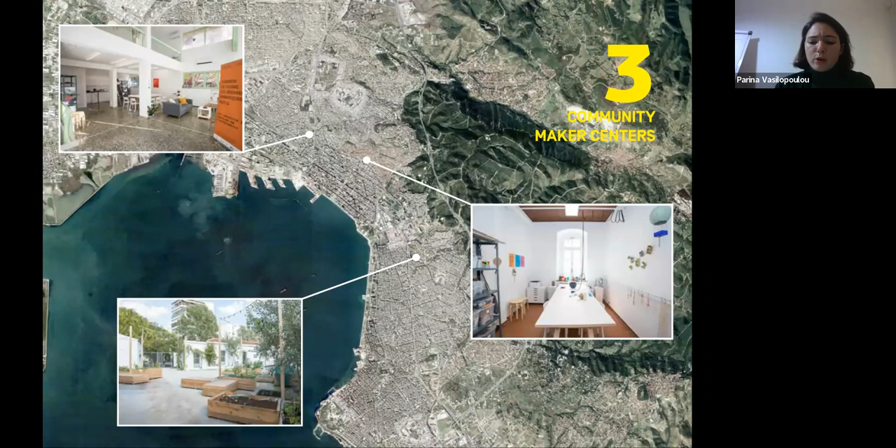So without further ado, these are some information about the project in Thessaloniki. We had created 3 community maker centers there, and I will discuss the connection with Elu right afterwards, in 3 different neighborhoods, very different neighborhoods as a matter of fact. And they were practically maker spaces. We have done more than 800 workshops and activities in those spaces, and we have a bit more than 13,000 active members and visitors so far.

The most interesting part is that a community has grown there. Right now, as of September, more than 80% of the workshops were organized by community members, and the vast majority believe that this is a vital space for their neighborhood. Now, the reason why I'm showing this is that accessibility and design, and trying to achieve impact through a system, takes me to ELU. So ELU is a project that had a target audience of students, young professionals and couples, traveling professionals, and retirees.

This was the beginning of it all, back in 2018. It was a weird time, really. We were a few years into a very deep crisis. There was a huge available building stock around the city, and that needed an upgrade.

One of our first commissioned projects had a business plan that called for micro housing, meaning between 17 and 25 square meters. There were all these different buildings in different spots in the city center, with very different floor plans that yielded very different layouts.

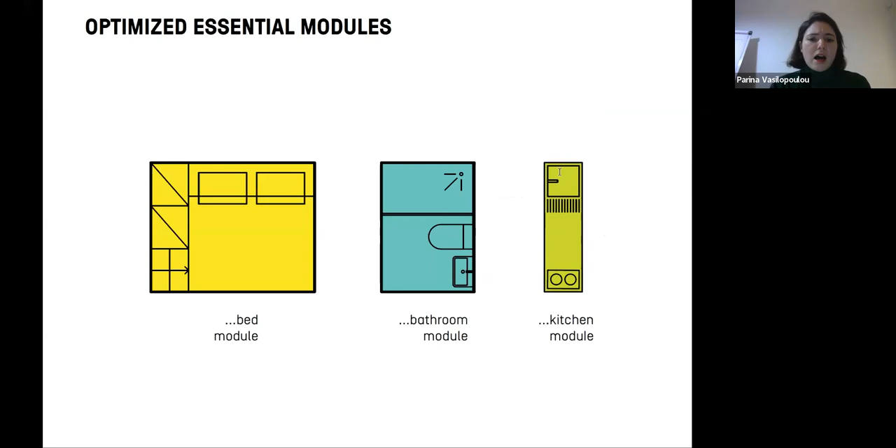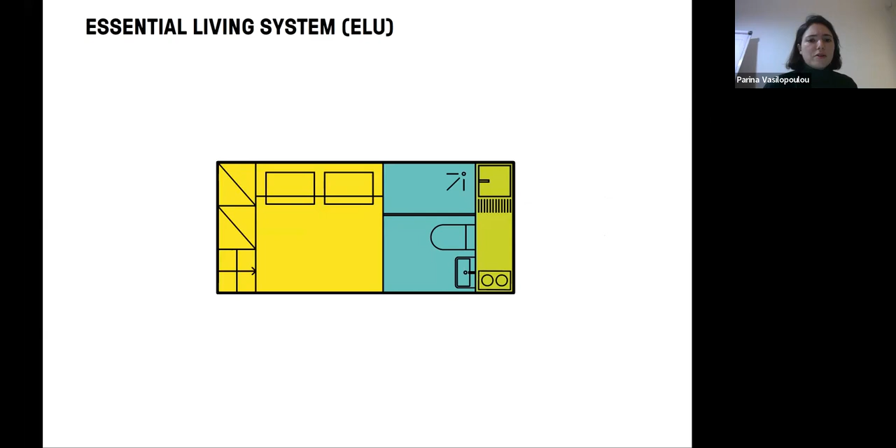This is the most customized experience. So we tried to optimize the essential modules: a bed module, a bathroom module, and a kitchen module. We researched over 1,000 examples of micro housing globally, a lot of them in New York as well. That's how the ELU, the Essential Living System, was created.

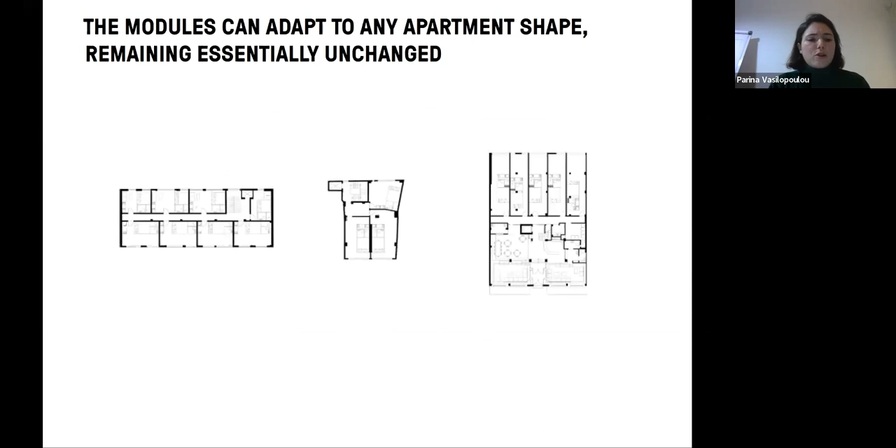The modules were essentially placed and can be placed in many different ways. I think of it as an assembly of pieces, and in that sense the type of floor plan doesn't really matter. The vessel itself doesn't matter, because you have all your basic functions there, and it's the same unit across.

So today's project, which I'm going to discuss, is Safous. This was the very first one. It's in Kalithea, Greece, so it's probably the only one outside the city center. We started from there because this was a demo, really—more to test the concept.

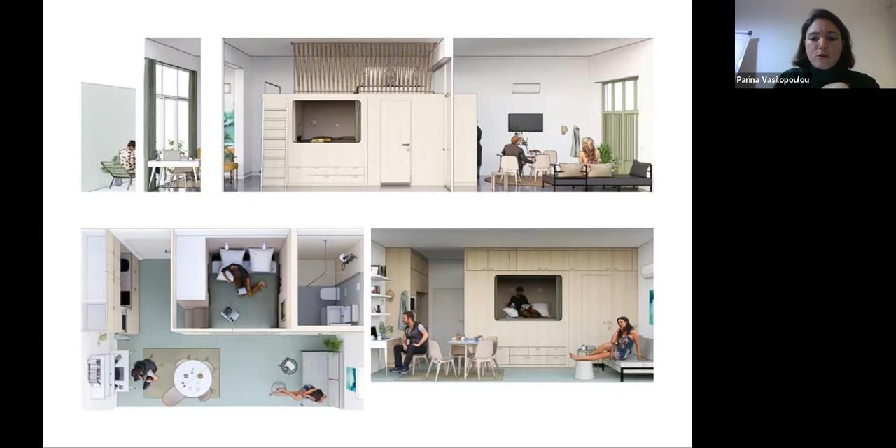So you get to have the ELU unit, the compact unit of bed, kitchen, and bathroom, and then the rest of the space can be customized by the user. This is more apparent here as well. This one was actually a 17 square meter apartment, which was very tricky in the beginning, but here it is—we have a picture of it.

You can see some pictures from the interiors of the spaces, and these are some of the buildings where the first version was applied. Of course, we continue the research and development of the unit as we go to more and more buildings.

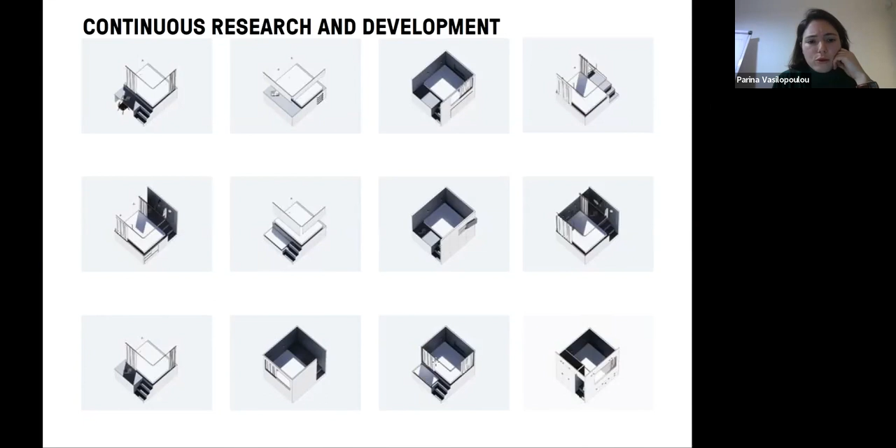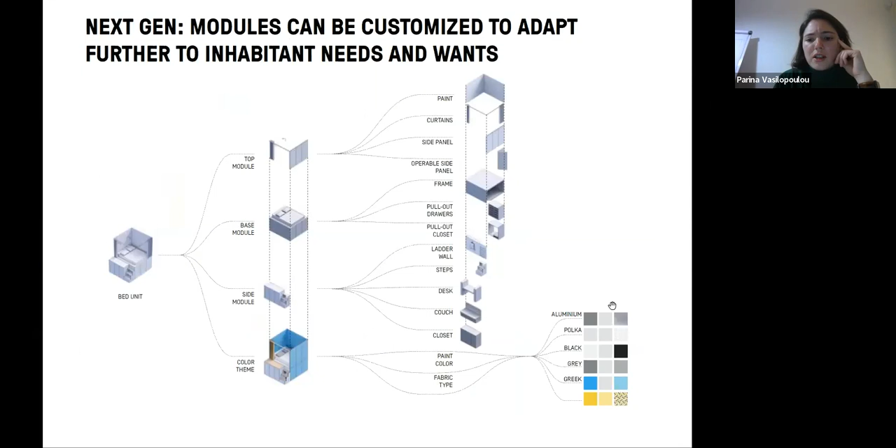So this is a living organism on its own, and there are various versions of it. To a certain degree, it's getting customized in terms of the building and the needs, so the clients—the people that live there—can also customize it.

Here you can see some of the examples. This is a more super compact ELU, which we're using in buildings with taller ceiling heights. You can see some examples here.

We get to reach the community part that I discussed in the beginning, which is a big part of our projects in all of these buildings. The common spaces, what we call the community spaces, try to exploit every possible spot on the building—we're talking about disused backyards, for instance, or rooftops.

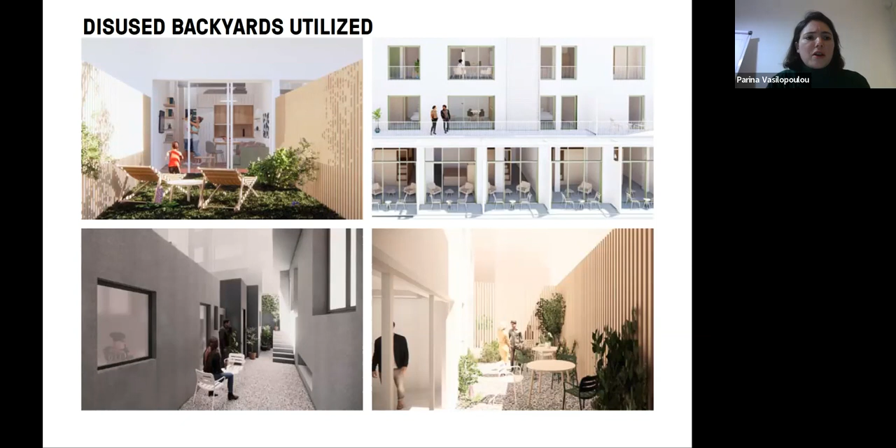This is actually quite a hit. In most of these buildings, people love them. They go do screenings there, they listen to music, they have parties. Through COVID, it was a place to actually socialize—they'd spend time inside the apartment, then go upstairs to socialize within their own building, so lockdown was a bit more bearable.

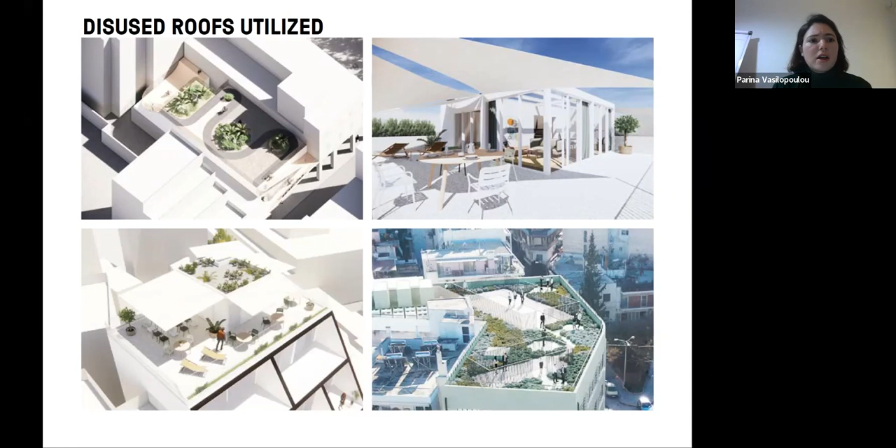Thank you so much, Parina. The presentation was great, and it was a fun fact that you went from the really big scale and big ideas to the micro scale of everyday living—perfect combination. So I don't know if there are any questions or comments for any one of the five presenters.

Okay, I have a question, if I'm allowed. I don't know if Electra wants to.